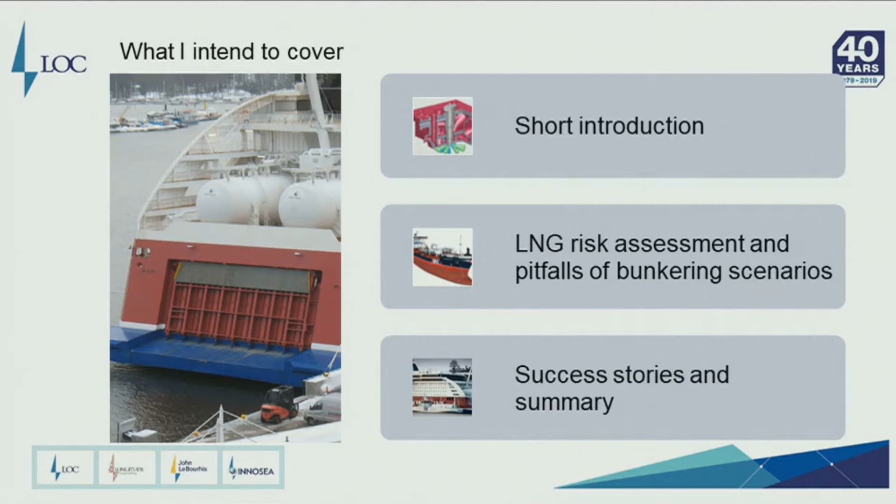So a short introduction, a little bit on risk assessment, and see what actually did fly and why it flew, although that maybe wasn't straightforward in the first place. So I hope this can be attractive. Yeah, LOC is a group of companies worldwide, and I sit on the shipping side of it. We have oil and gas and renewables as well.

So as you already said, it's getting increasingly attractive to use LNG as a fuel. I started almost 10 years ago with LNG as a marine fuel, moving back to Sweden from Qatar and Angola, doing large-scale LNG there. And the first thing was I had to go to South Korea and do a project there. So that was very interesting, and I did that for 5 years. It was a very, very interesting thing.

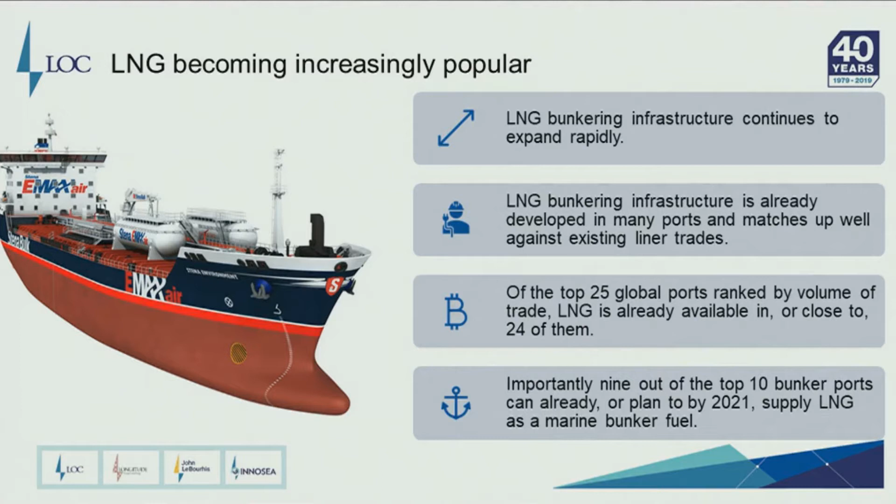And now, seeing the presentations that I gave a long time ago, 9 years ago, we just hoped to get there, and now we're there. So lots of the obstructions back in the day have now gone. I'm not saying they're all over, but we are getting there, where there is an infrastructure built up. So the next phase is to start building ships to actually use this fuel.

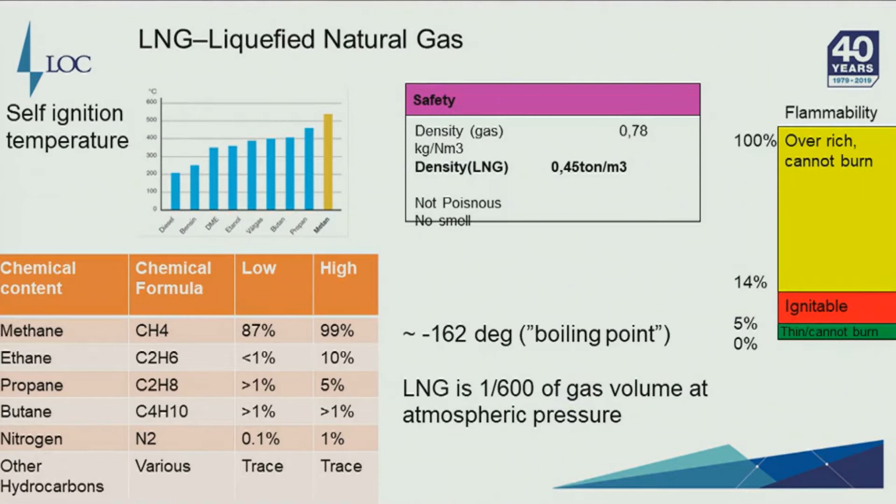I don't know what's been said today, but just a little bit on what LNG is. For all purposes it is mostly methane, and it's cooled down to minus 162 degrees, and then we get 600 times less volume than we have for the gas. It is difficult to self-ignite, so it is not as hazardous as we may think. It's still very hazardous, but maybe not in the same spectrum. At lunchtime here we discussed hydrogen, which is on a completely different scale.

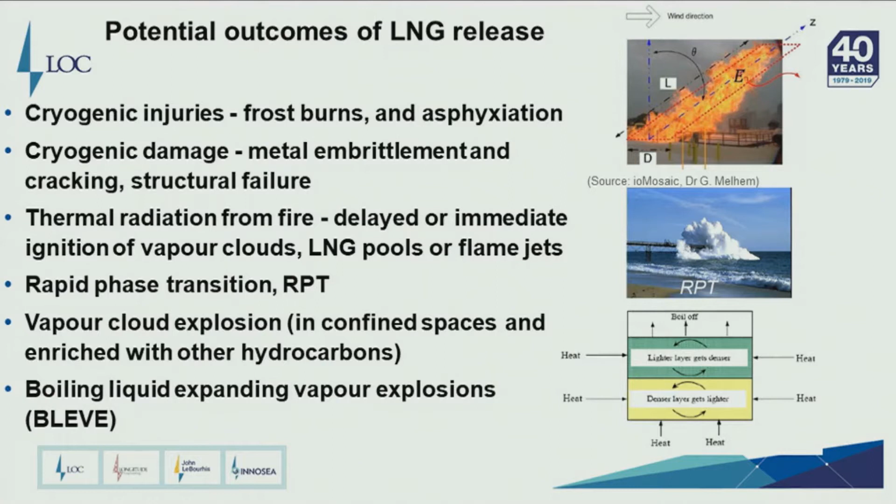And what can happen? I would say that the incidents I've heard of have mostly been connected to it being very, very cold. I haven't heard so much of big bangs, nothing really, but cryogenic burns on persons, and actually cryogenic problems with steel. I have heard about those incidents. So we shouldn't forget that it is minus 162 degrees. It is very, very cold. And obviously it can explode and all sorts of bad things can happen with the gas, and that just further enhances that.

But we must also see that there needs to be somewhere where it can explode, and just because we have a leak doesn't mean that we burn or explode. And generally, explosions aren't what we're going to see. Rapid burning is probably what we're going to see if we see a big thing.

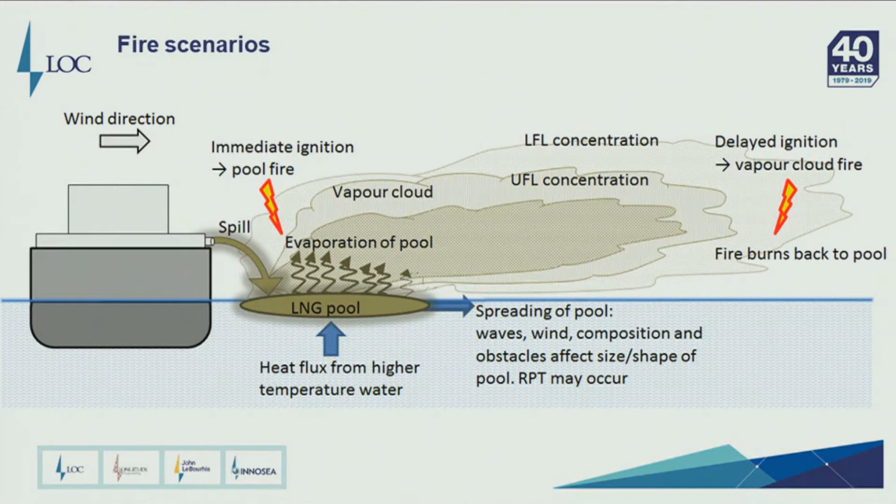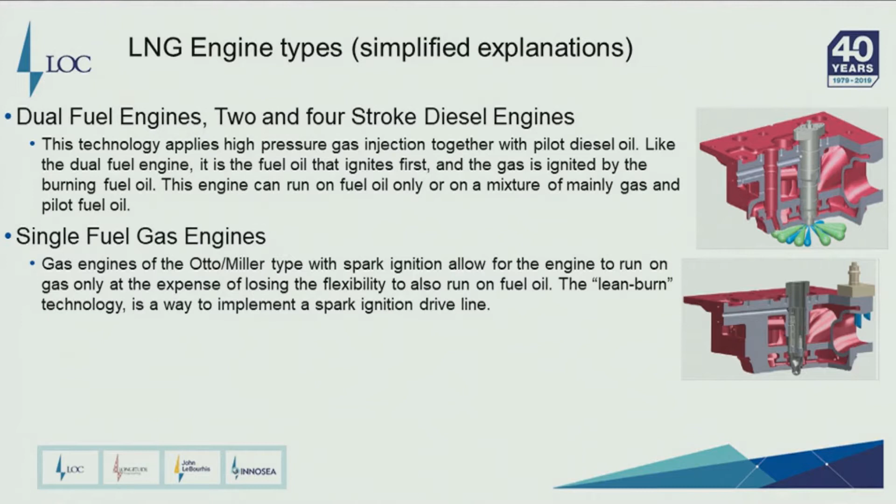Then just quickly what it is. I know some of it has been said. There are two types of engines. There are the dual fuel engines, which use the diesel principle, where we have a diesel pilot fuel to make sure that we ignite the gas. We have the single fuel gas engines. I'm not sure, but I still think it's only one engine manufacturer that makes them. So it's mainly dual fuel that is installed, but actually one of the examples that I will be giving uses a single fuel engine.

Tanks are a whole concept by themselves. So what to do? First of all, type C or type A or B is probably going to bother a lot of people. Most of today's world, almost singularly, is type C, because it's so much easier to operate. Operationally you take away a lot of hazards. So if we're going to put in a type A or B tank, which can't withstand pressure in the same way as a type C tank, we have to build a lot of other things to it, both operationally and mechanically, which is difficult.

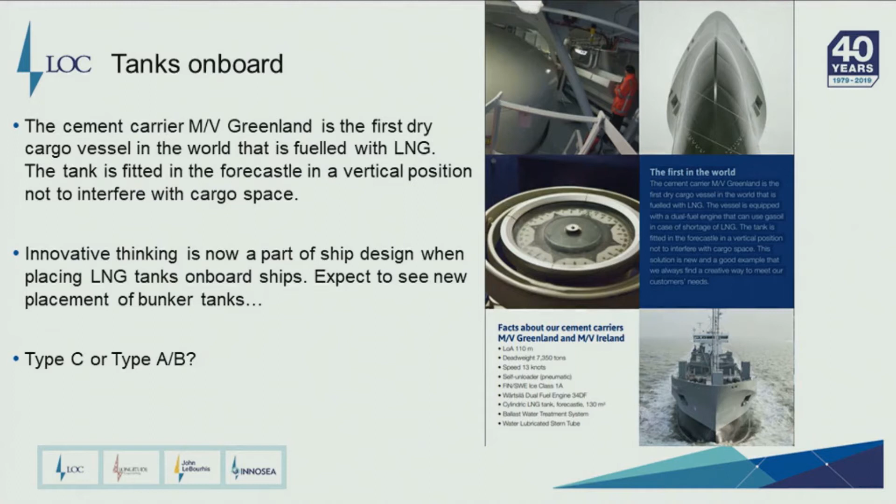But having said that, when we are moving forward, we have to place these tanks somewhere. It is innovative thinking, but it also gives challenges when we do that. So it's something to think about when we move forward. And I think we saw the AIDA cruises that had them hidden away as well. So they all have their challenges of where we put them. And also for bunkering, we'll see later on.

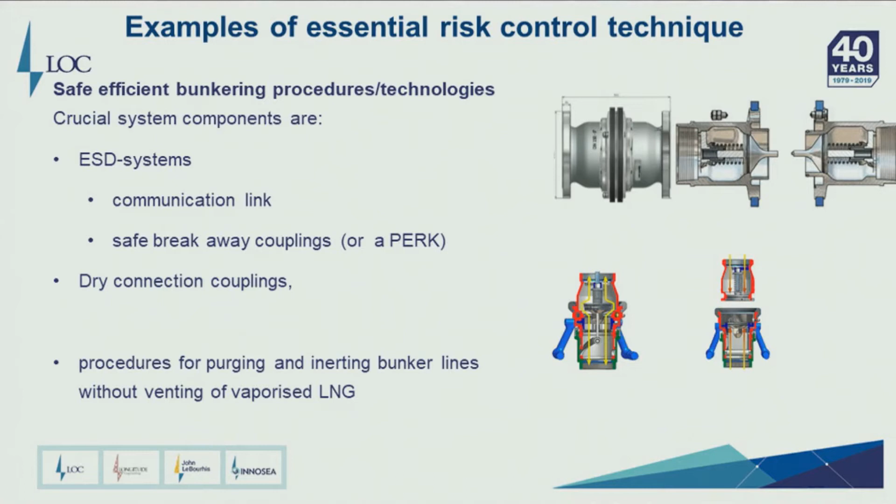The bunkering process is actually not that dissimilar from bunkering oil. This is moving a liquid from one point to another. So in its essential basis, it's not much different from what you would do if you bunker heavy fuel oil. There is the ESD link, and we have something called cool down, which we need to do. But apart from that, the operational part is actually not that difficult or high tech. But since it is cold and it's gas, we have to be very careful in what we do.

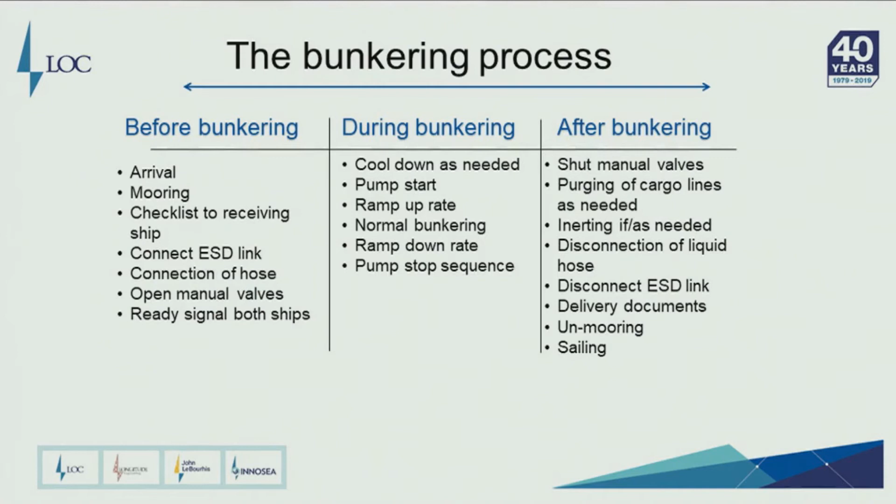Again, very simplistic system. One of the systems I'll show today actually doesn't have the vapor return hose at all. They are using Type C tanks, and with that they make sure they take care of the increase of pressure within each of the systems. So it depends on the situation. But if we don't have a system that takes care of that, again, both ends of the system must be able to do that.

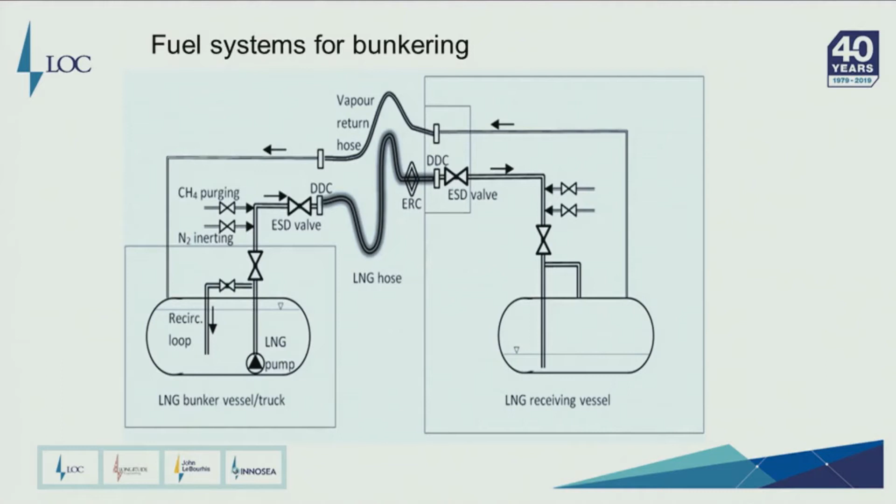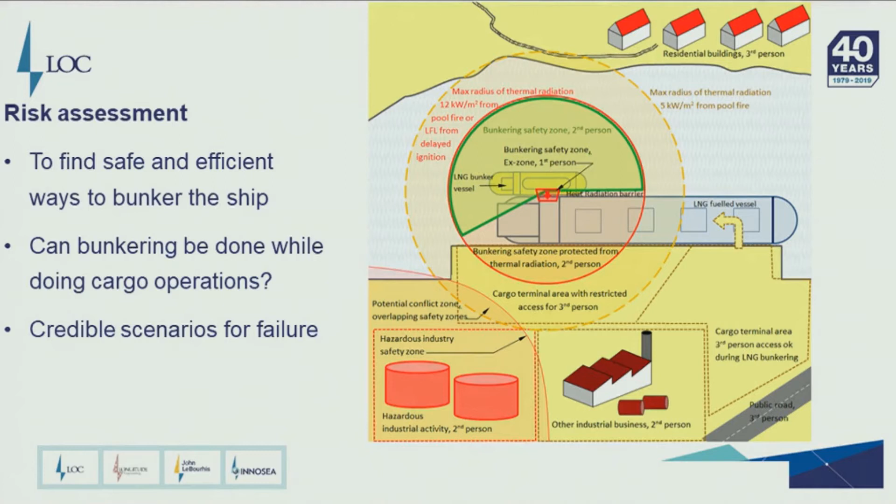I know this was mentioned before as well, and the whole thing of going ahead is to make sure of the safety zone around here. And what kind of credible worst case scenario can we do? Generally that is hose rupture. The hose rupture is generally the scenario that decides things, and how quick we can stop the pumping and the valves is generally what determines the risk assessment. If we can get that down one way or the other, then we can usually go ahead with LNG fuel on fairly many occasions.

We mentioned infrastructure. If we move from a large LNG terminal, we load it onto a feeder ship, move that feeder ship into a small terminal, bunker from a small bunker terminal. We started at minus 162 degrees, and then we move this LNG around. What is it when we bunker? It's not going to be minus 162 degrees. That's the dream world. So we have to mitigate against warm LNG being bunkered. I have seen figures around minus 140, minus 142 degrees being bunkered.

And if you don't have a way of handling that, you have to have a different infrastructure system, a way to cool it, and that costs a lot of money. So that's something you have to mitigate, because in this whole chain it's only thermoses we are moving around, and handling this cold thing in this infrastructure will affect the commodity we are transporting. So we have to take that challenge on. What will the temperature be when we pump it on board? That's a big challenge, and these may be very far apart.

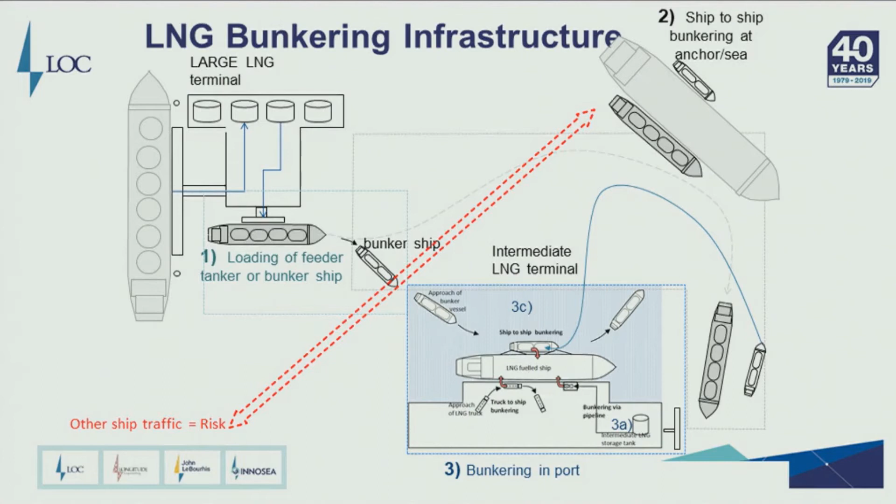So what does that give us when we then go on board and actually do a risk assessment? You probably can see where I was. There was this passenger ferry somewhere in Scandinavia, in a non-named port, that usually bunkered the ship with a truck. And this went very well. Actually, before I came on board, they had a small incident. There was a leakage, but in general terms, they had done lots of bunkering there without incidents. But they wanted to start bunkering by a bunker ship instead, because this bunker truck had to go very, very far to get there. It was a challenge by itself. So that was the reason.

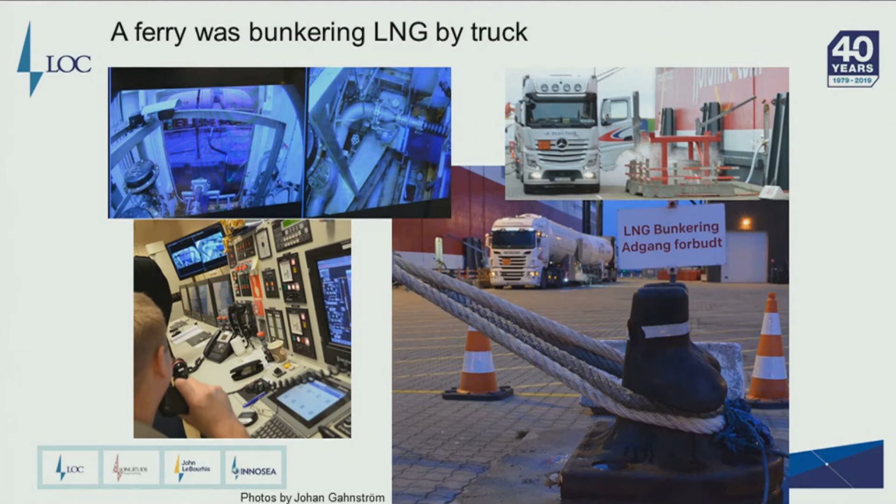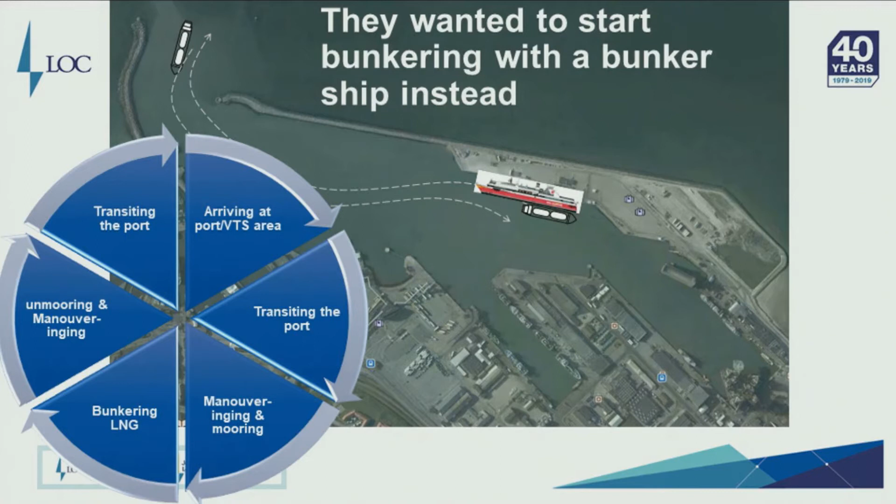The supplier then had sourced a ship that was supposed to come into the unnamed port, which some of you recognize, bunker the ship, go out again, and that was happy days, because the ship was already done. It's been running like this for a year when we got involved. However, the bunker ship wasn't a dedicated bunker ship. She was transporting LNG, but she was actually not designed to do LNG bunkering. She was pumping LNG all over the place, but she was very big for the ship that we're not talking about. And since the ship wasn't designed for this, things were sticking out all over.

This is actually the bunker port sticking out down there, and the bridge sticking up all the way to the side, and no available fenders that could actually push the ship outside. That proved to be a showstopper. It just could not be done. And even if we had very big fenders, it would require a very small angle of heel before you're actually starting to hit this one. And again, if we applied the hose rupture scenario that I discussed earlier, we just could not make that out, because if we dropped that one down, that would go. So our scenario was, couldn't do.

Another thing was the mooring capacity. There was no way to moor this ship. We would have to run mooring lines all the way forward and all the way back. She was not designed for this. I think possibly they've done something on her later, but at that time, that never went ahead. So this project was cancelled.

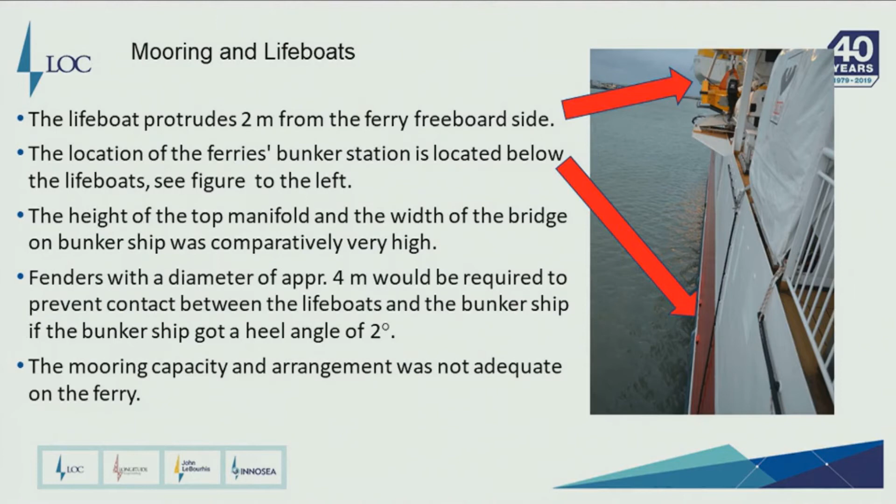And just out of curiosity, when we talk about how they need to work together: the ESD system is the emergency shutdown system. ESD 1 is when you stop your pumps. ESD 2 is when you actually disconnect the hose. Without going into details, this was different between the bunker ship and the bunkered ship. You can make these two fly together, but at the time, they weren't. So which one do you then design the final system on? And if you influence one, that's actually the integral system you have designed your ship on. Are we now going to inflict that on mine? And this is kind of a knock-on effect when we start that.

So this is difficult because, as was said earlier, the compatibility between the two systems, they need to fly. Trapped volume is a whole subject by itself. When you disconnect hoses, warm LNG stays in a hose and then expands 600 times, and all sorts of nasty things can happen that need to be resolved. But we leave that for another day.

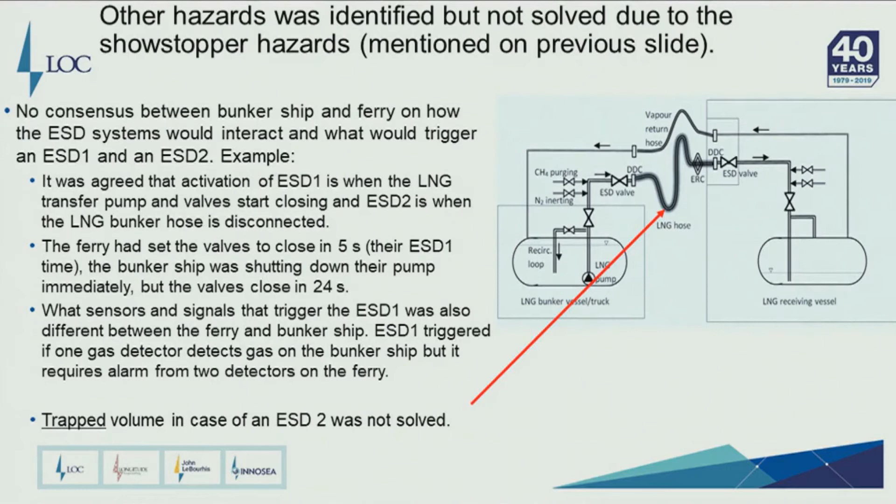The next system that never flew was a very specialized Ro-Ro carrier. To my knowledge, she was built without being LNG fueled. It isn't this ship, but it looks very much like the plan that we were involved in. There was a bunker port somewhere here. The inlets for all auxiliary engines and everything were up here. There was loading going on there, and she was supposed to be bunkered by a truck from the shore side. And as you can see, she was running an auxiliary engine just above where we were.

Trucks running around the whole place where this happened, and we could not get this to work with any sort of credibility. I think everyone involved could see that in the end. I don't know why they couldn't turn around some of the points that were pointed out, but they decided not to in the end. So this never flew. I think they do have some new build ships, but as I said, they're not with LNG.

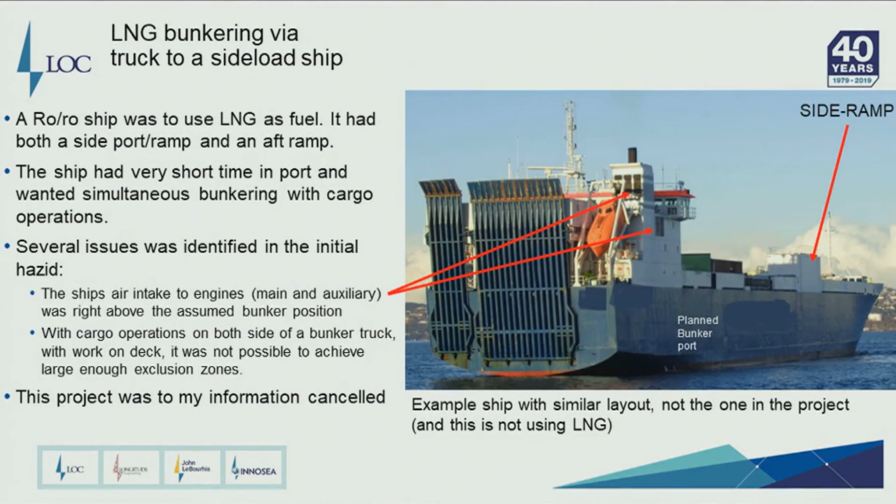So what happens if we then go into talking of something really difficult? What happens to an LNG-fuelled ship if something really bad happens? And if this fuel system isn't directly affected, it still has problems, because at some point it needs to vent. At some point the 7 bars of the Type C tanks will have to be vented.

And if you are stranded somewhere and there's a blackout on the ship, it imposes a lot of different tasks on what to do. So without going into too much of the problems, make a quick risk assessment of what you have at hand if there is LNG on board, because you possibly have to do something relatively quick. You may have a number of days, but not much more, before this is going to be a major problem. So act quick, is that what we can say?

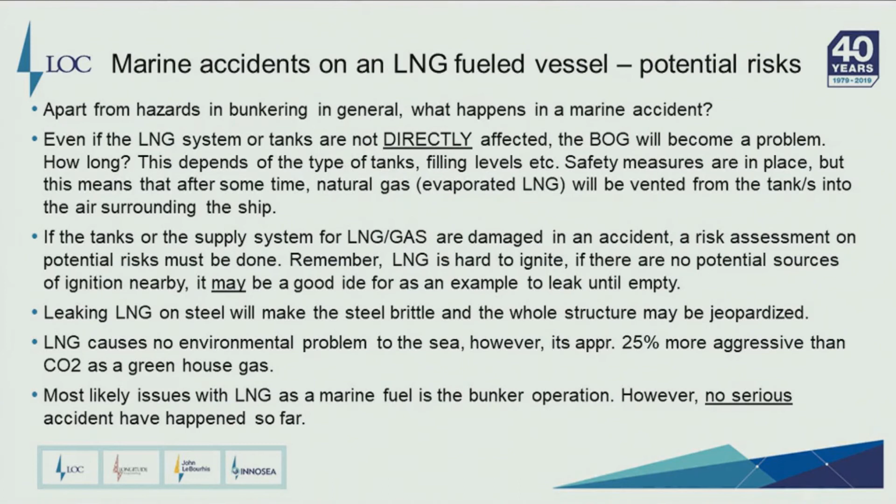So it's not always bad, is it? This is a very, very odd setup. This is the first LNG-fuelled passenger ferry in the world, Viking Grace. She's been running for years and years now, and the infrastructure around bringing this LNG to her is actually a little bit of what I described earlier, the worst case scenario. This is a medium storage tank of LNG that is being fuelled from Europe. Then it's taken by truck up to Stockholm, loaded onto Seagas, and then filled up on the ferry.

There is a long story of why that happened, and it is still today a kind of interim solution where AGA, who was the gas supplier, is also owning this. They want to have this bigger infrastructure, but they only got one customer when they started out. And to then build a bunker ship purely for her was too difficult. Getting that one in and out of Stockholm was possible, but it's a journey of almost 4 hours. And in the winter time there's ice out there, so they decided not to go for that. So they're driving and still do that. And they still hope that they will have more customers so they can put Seagas into retirement.

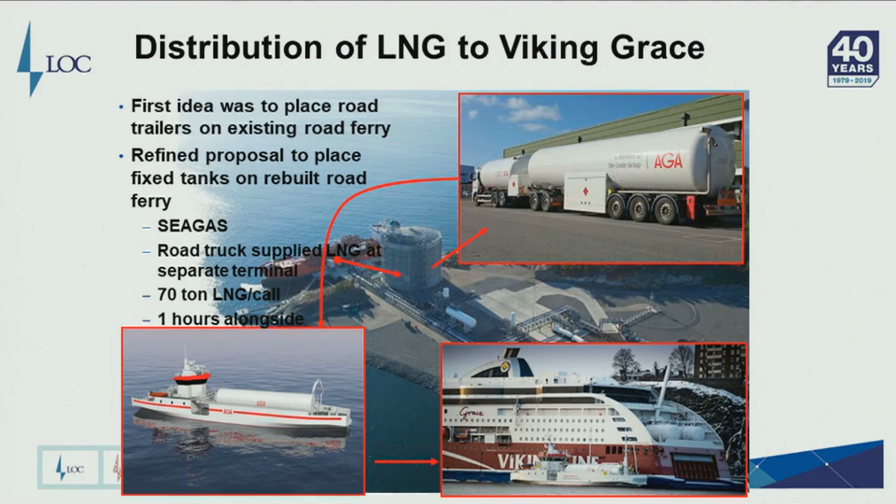I was involved in this from the very beginning, and what they do is they actually have passenger handling on the other side. They load and discharge at the ramp, but what is important here, there's nothing overhanging on this side. This can be a completely sealed-off area; everything in this ship within the exclusion zone of 25 meters from the bunker port is cleared off. So you could manage that kind of area. This actually worked very well, and I think today she's possibly done 1,500 bunkerings or something like that, once every day. Just quickly show a little video.

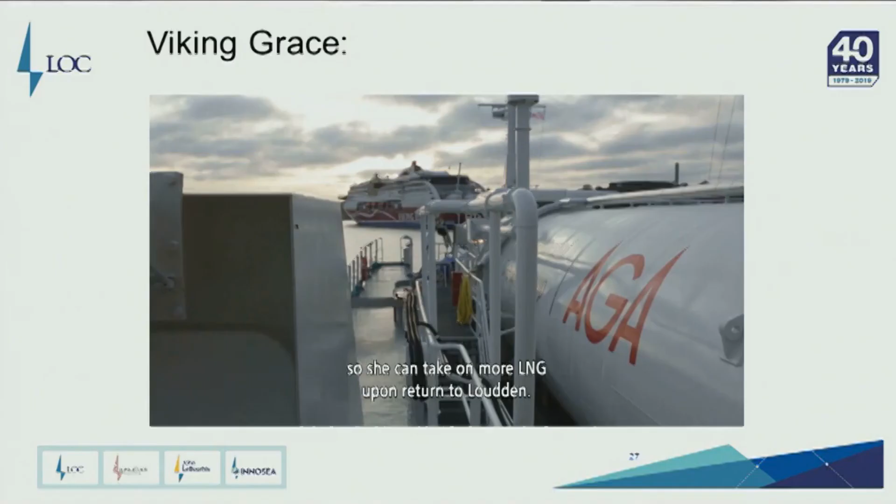So, when you design a ship, the scenario you designed the ship for may not be the one that will actually be used in the future. The first thing is it wasn't designed for fuelling with a ship, but in the end they wanted to do something else, and then that proved difficult. So it is very important when you make the designs that they are proven for the situation, and if not, try to come up with an alternate solution.

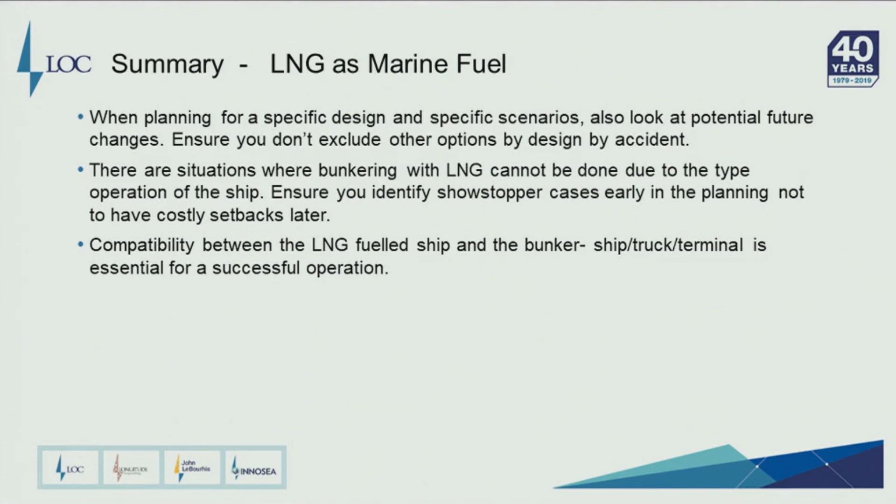It's usually possible. I mean, the situation of the Viking Grace, doing that in an hour's time, is challenging, but it worked. But it only worked because they actually started early. I was in Turku, in Åbo, before the keel was laid. That's how early this was. And the bunker supplier was involved from the very, very beginning. That's the only way that worked. Otherwise, I think that would have been a very challenging task. And I think I said compatibility studies. So that's me.